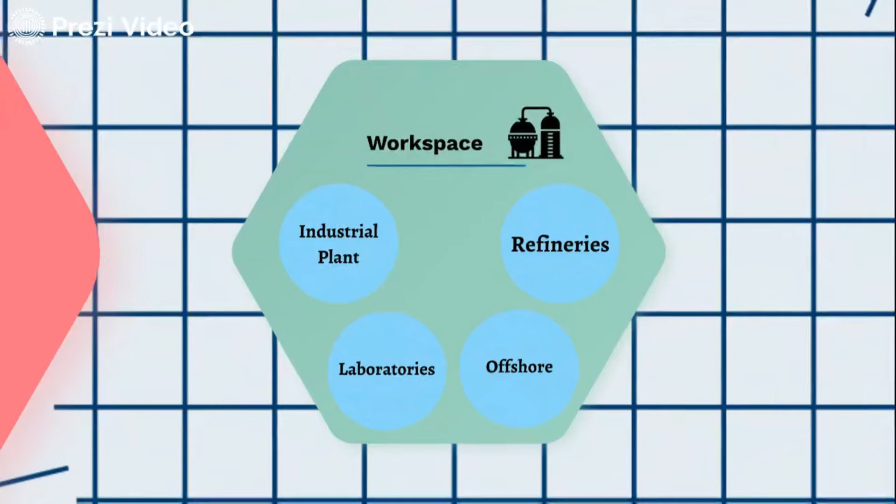And what is the difference between chemical engineering and other engineering? Chemical engineer is one of the most in-demand engineers with a higher average salary due to our knowledge and flexibility in skills, such as salary, flexibility, demand.

Next, you might be wondering what is the scope of study to become a chemical engineer. As chemical engineers, we are always hungry for knowledge and urge to learn something new. Some of the knowledge can be gained by further studies and some from entering the career life of jobs.

Some of the courses that will be taken to become a chemical engineer are mass balance, energy balance, fluid mechanics, separation process, chemical reaction and waste management. And the job scope for chemical engineers includes chemical engineer itself, petrochemicals, process engineer, healthcare, safety industry, design and others. That's all from me. I will pass to my friends to continue to explain about distillation and its application.

In this video, we will briefly explain distillation. As chemical engineering students, this topic is one of the many processes we learn in separation process. Let's go to the first part, which is the history of the distillation process. The earliest known evidence of distillation comes from a terracotta distillation apparatus dating to 3000 BC in the Indus Valley of Pakistan.

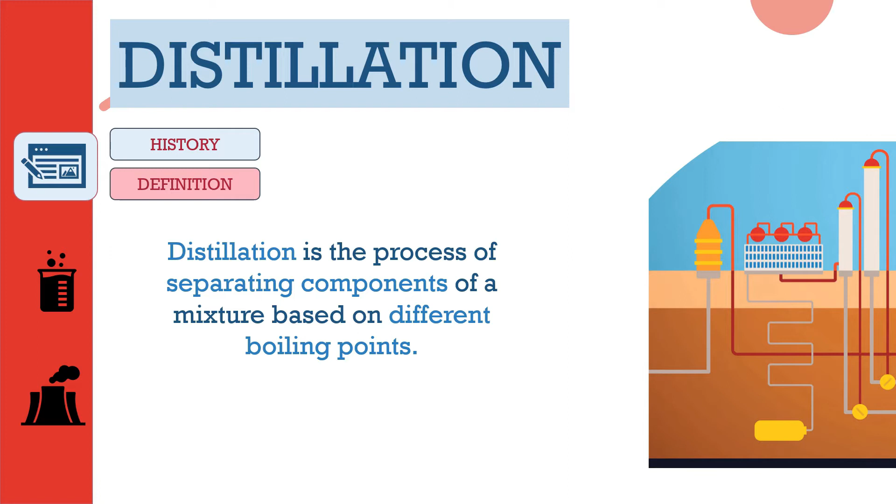We will move to the definition of distillation. Distillation is the process of separating components of a mixture based on different boiling points. This is the simplest experiment to show us how this process works. The first part is evaporation.

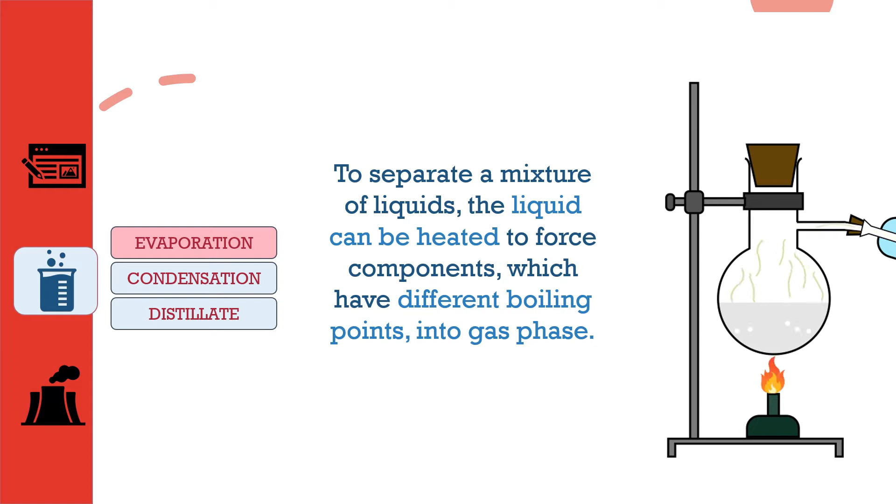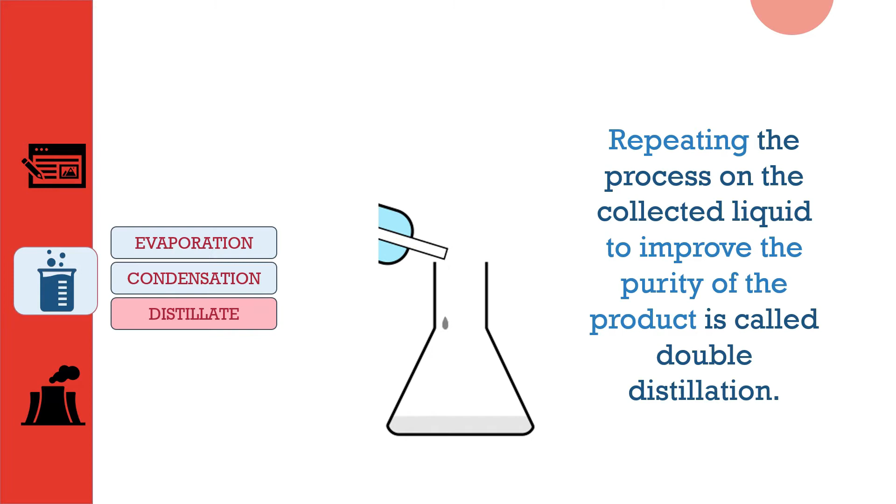To separate a mixture of liquids, the liquid can be heated to force components which have different boiling points into a gas phase. Next, the gas is condensed back into liquid form and collected. Then, the distillate which has been collected is the compound of interest of the process. Repeating the process on the collected liquid to improve the purity of the product is called double distillation.

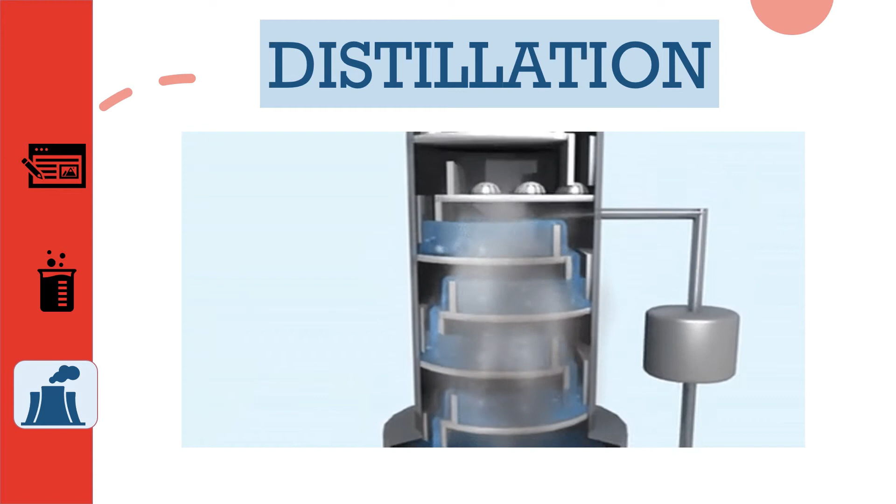The distillation column is an essential item used in the distillation of liquid mixtures to separate the mixture into its component parts or fractions based on the differences in volatilities. Fractionating columns are used in small-scale laboratory distillations as well as large-scale industrial distillations. A vertical shell houses the column internals, and together with the condenser and reboiler, constitutes a distillation column.

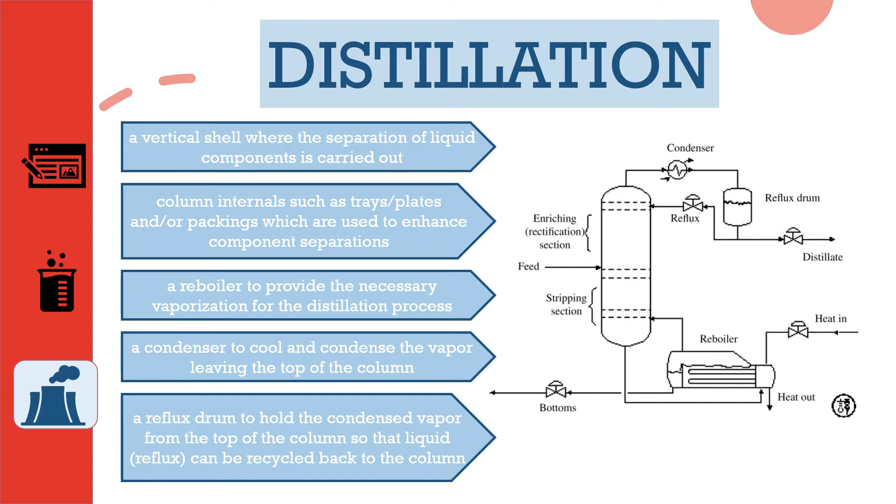A schematic of a typical distillation unit with a single feed and two product streams is shown below. The liquid mixture that is to be processed is known as the feed, and this is introduced usually somewhere near the middle of the column to a tray known as the feed tray.

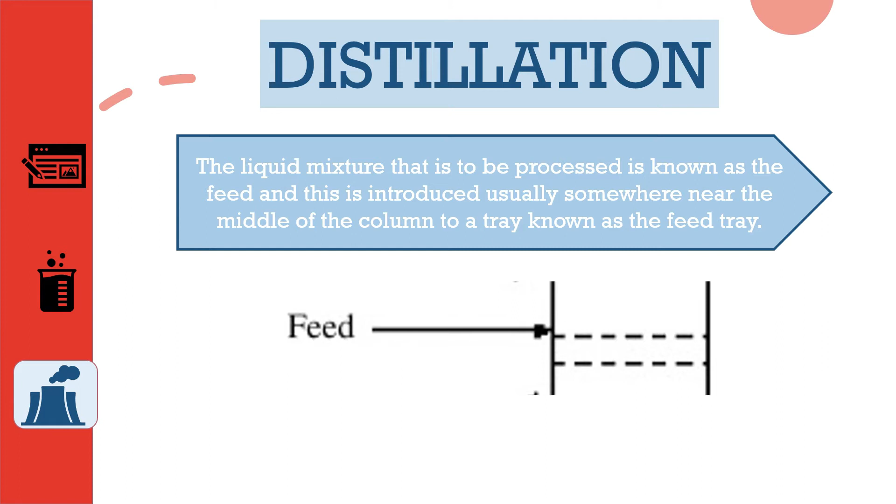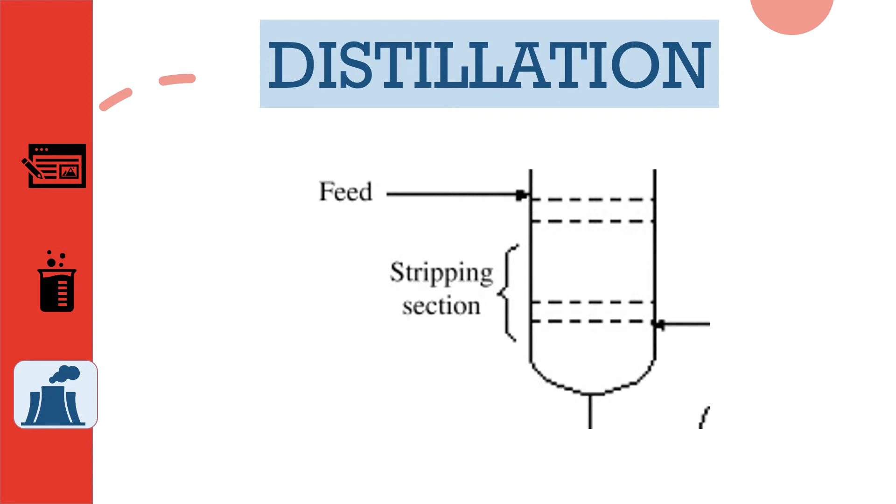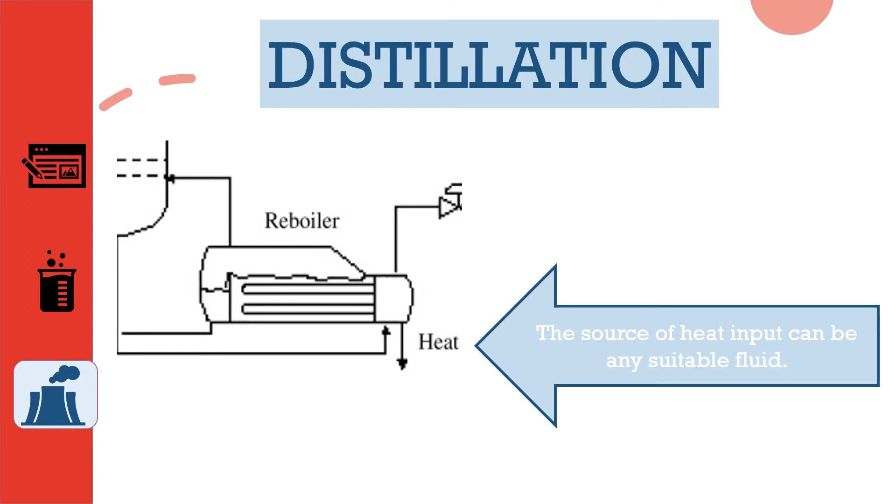The feed tray divides the column into a top enriching or rectification section and a bottom stripping section. The feed flows down the column where it is collected at the bottom in the reboiler. Heat is applied to the reboiler to generate vapor. The source of heat input can be any suitable fluid. The vapor raised in the reboiler is reintroduced into the unit at the bottom of the column. The liquid removed from the reboiler is known as the bottoms product or simply bottoms.

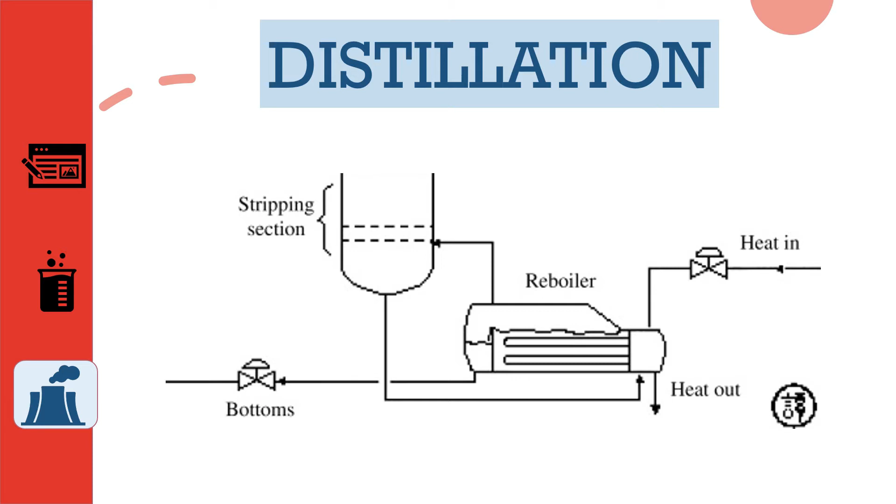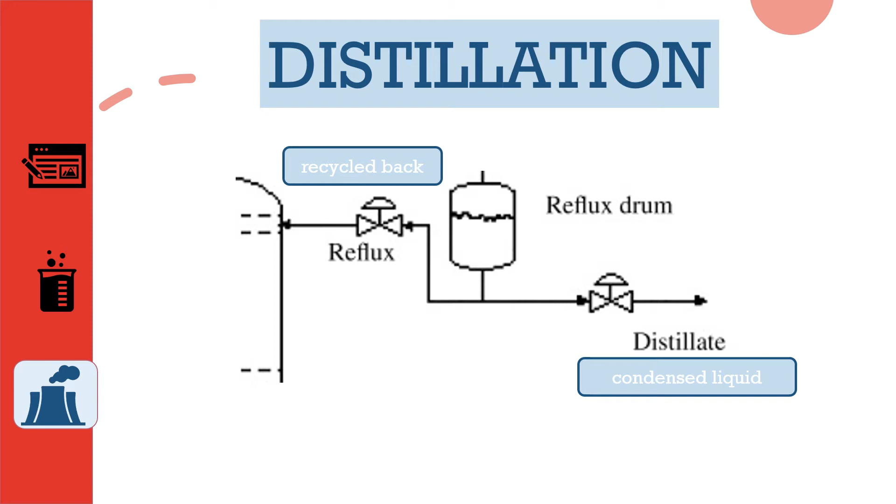The vapor moves up the column and as it exits the top of the unit, it is cooled by a condenser. The condensed liquid is stored in a holding vessel known as the reflux drum. Some of this liquid is recycled back to the top of the column and this is called the reflux. The condensed liquid that is removed from the system is known as the distillate or top product.

Next, I will explain the flow of the process. The distillation column is made up of a series of stacked plates. A liquid feed containing the mixture of two or more liquids enters the column at one or more points. The liquid flows over the plates and vapor bubbles up through the liquid via holes in the plates. Liquid travels down the column. The vapor comes in contact with it several times due to multiple plates, known as a critical process in distillation columns.

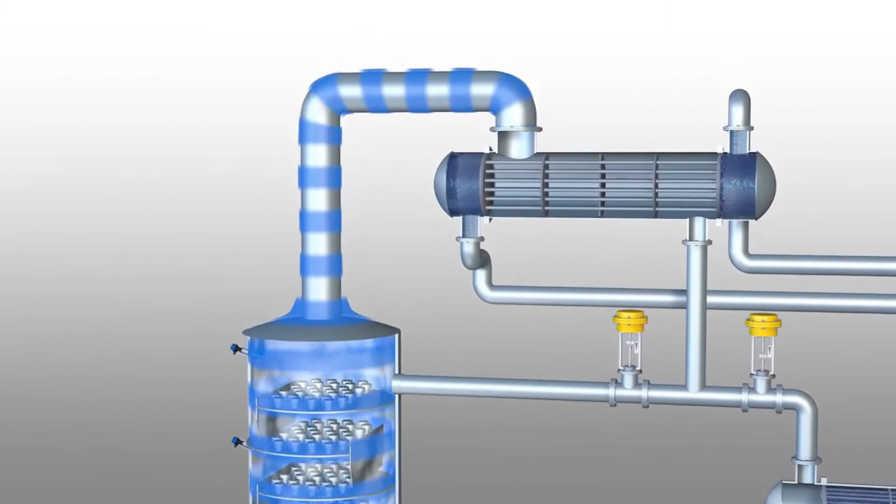Some vapor escapes from the top of the column and is returned to a liquid state in the condenser. Some of this liquid is returned to the column as reflux and the remainder is the top product or distillate. The liquid removed is known as bottom product or waste.

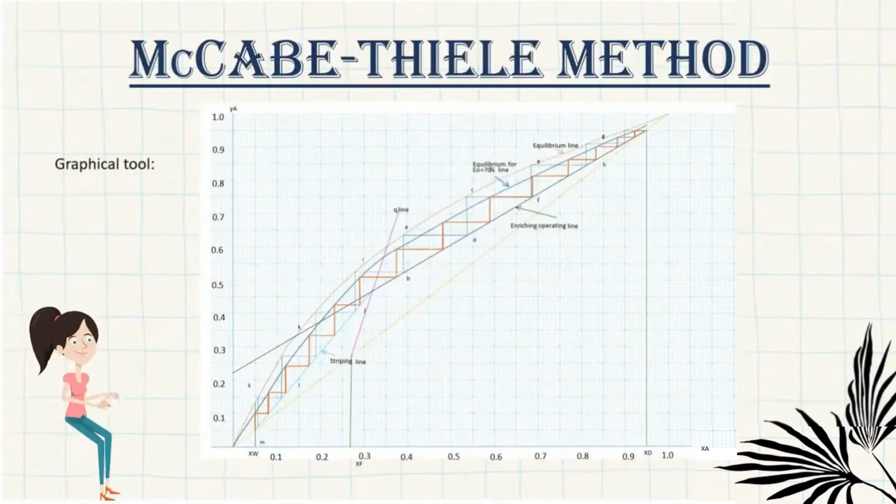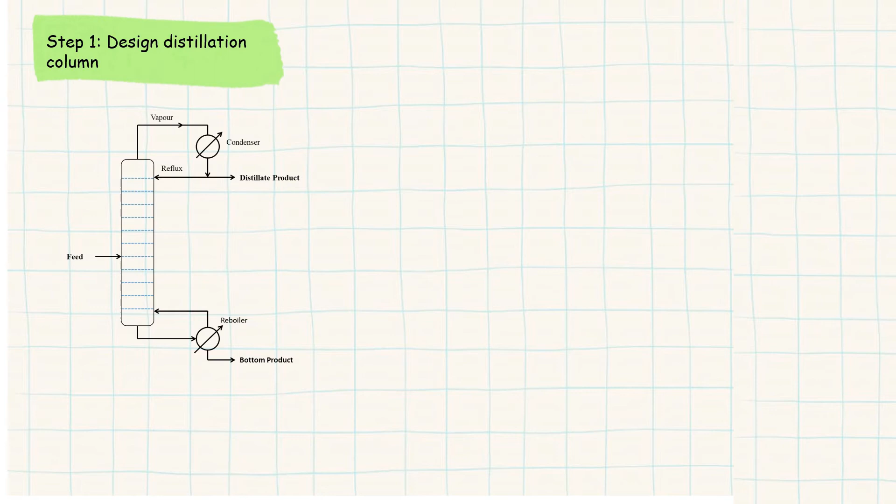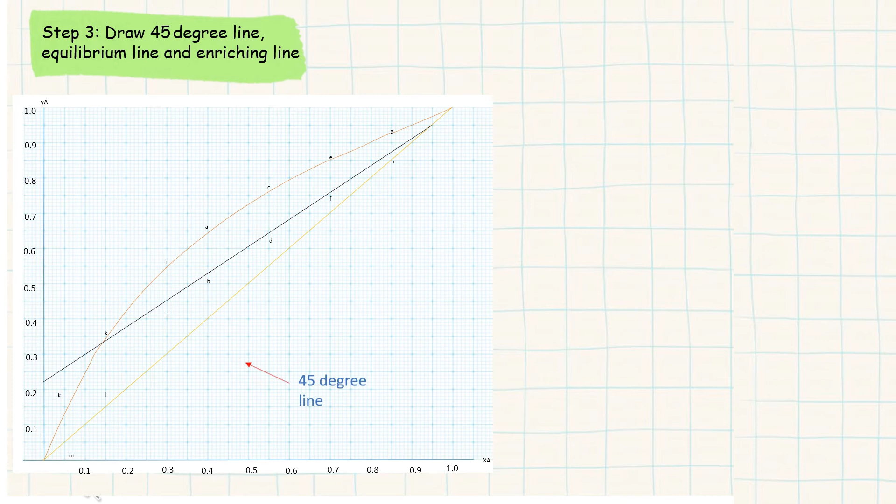McCabe-Thiele plots provide a simple graphical tool for analysis of binary distillation, specifically the determination of the number of trays required. How to calculate the number of trays using the McCabe-Thiele method. Step 1: we need to design the distillation column. Step 2: complete the information, which covers the molar flow rate and composition of each stream. The next step is we need to draw a 45-degree line, equilibrium line and also enriching line. Then we need to mark the composition of feed, top and bottom product on the x-axis.

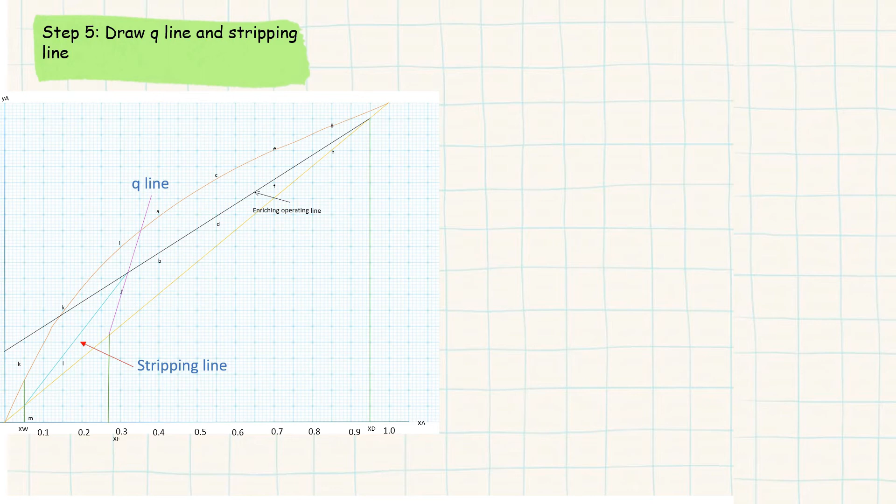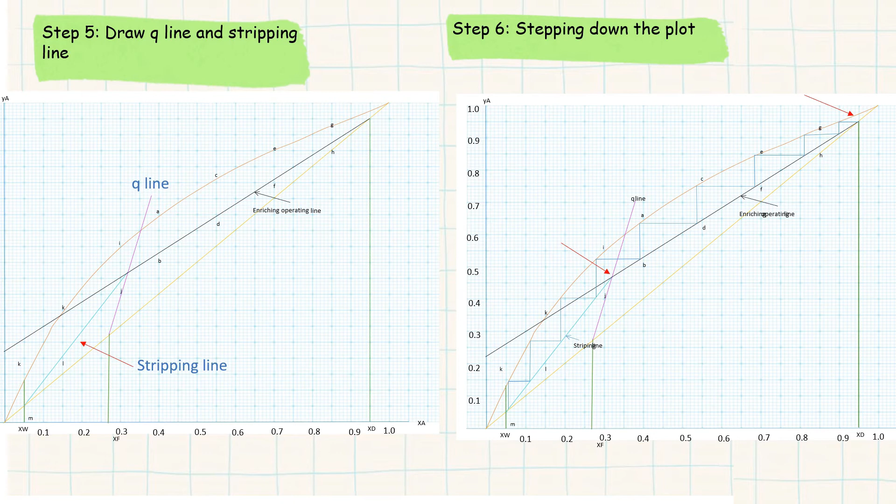The next step is to draw the Q line and stripping line. The Q line needs to meet the 45-degree line until it intercepts the VLE curve. Step number 6 is stepping down the plot. Starting from XD, make steps between the equilibrium line and enriching line to the Q line. Then shift to the stripping line after passing the Q line. The last step is counting the trays. The number of theoretical trays can now be determined by counting the number of steps starting at the top right and moving to the bottom left.

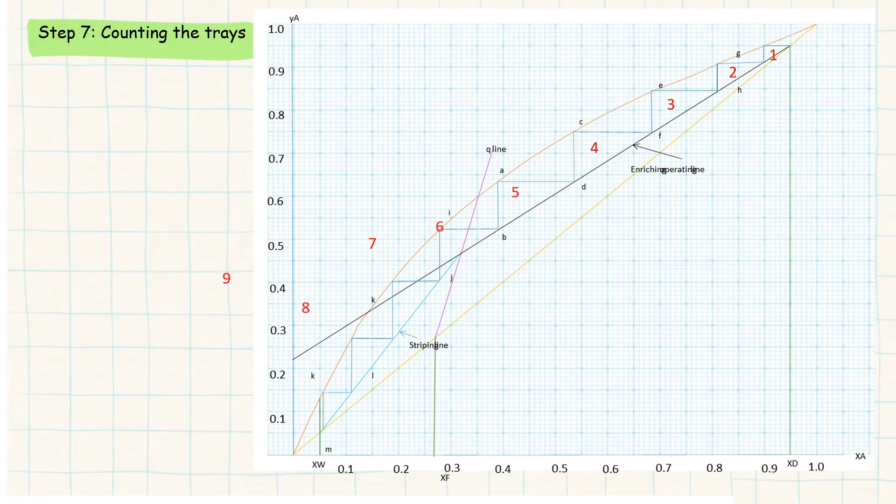Now we are going to look at the application of distillation. Distillation is one of the most important processes that, without us noticing, is part of the process of producing substances for our daily life usage. The process is used regularly in chemical and pharmaceutical research, quality assurance, testing for many consumer products, and law enforcement forensics. There are a few applications of distillation in the industry itself.

For example, oil refinery. Oil refinery is basically a process where the petroleum is transformed and refined into several useful products such as gasoline, diesel fuel, lubricating oil, fuel oil, and many more. This process can be done through the fractional distillation process to separate the crude oil into these materials.

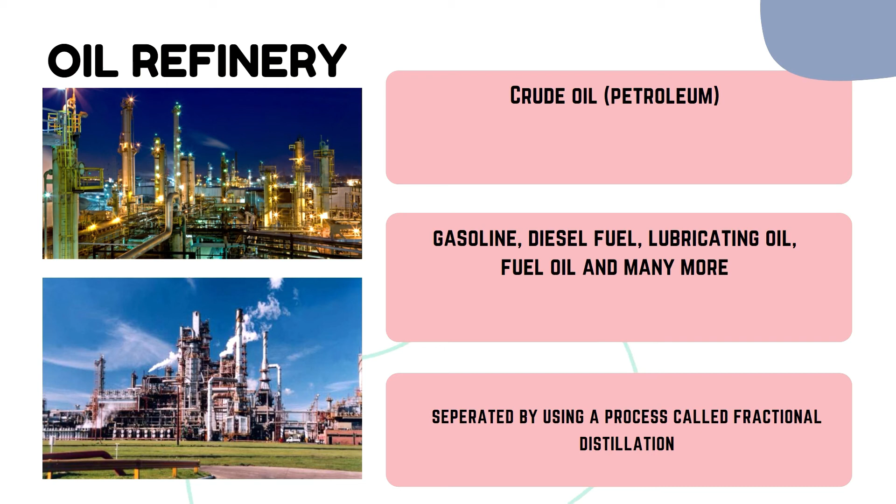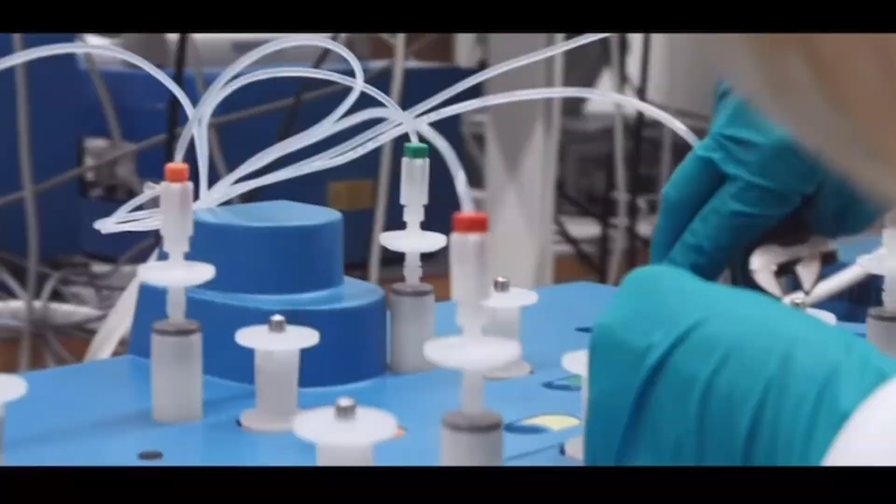Next, we have medication. Medication is also one of the most important productions in the industry that requires the usage of the distillation process, the process of the industrial scale synthesis of pharmaceutical drugs by pharmaceutical companies. Inside the pharmaceutical industry, the distillation process is generally utilized to remove or exchange one or more solvents in the preparation for isolation of an active ingredient or intermediate efficiently.

The main part of the medication sector that uses the distillation process is drug manufacturing, which is essential in providing medicine to individuals that need it. The medication sector prioritizes consistency and purity of the product, which promotes several purposes in the industry and also the society.

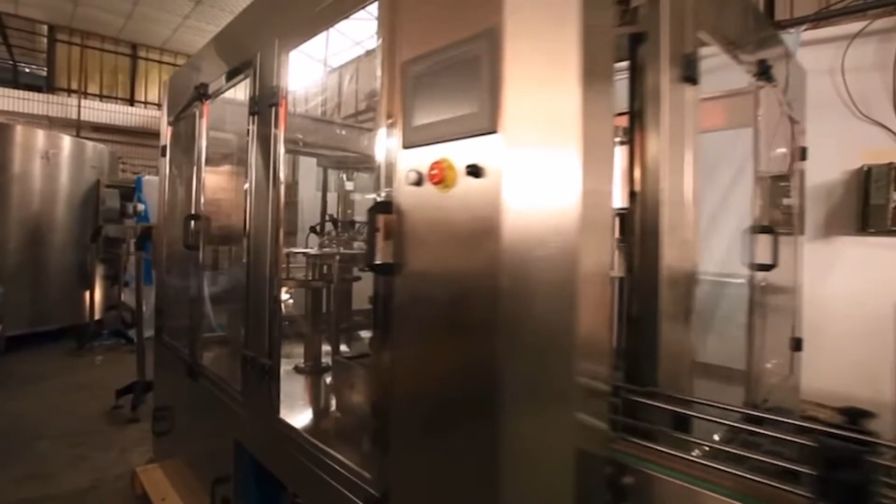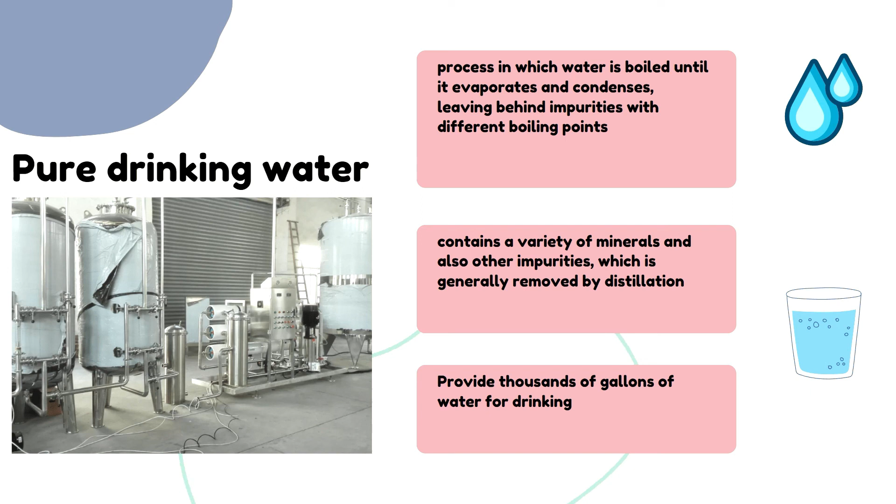As for the application in our daily life, it is involved in one of the most important basic needs as a human being, which is the production of pure drinking water. Water naturally contains a variety of minerals and other impurities, which are generally removed by distillation. The process of producing pure drinking water involves boiling water until it evaporates and condenses, leaving behind impurities with different boiling points. This process happens on a large scale as it is important to provide thousands of gallons of water for drinking.